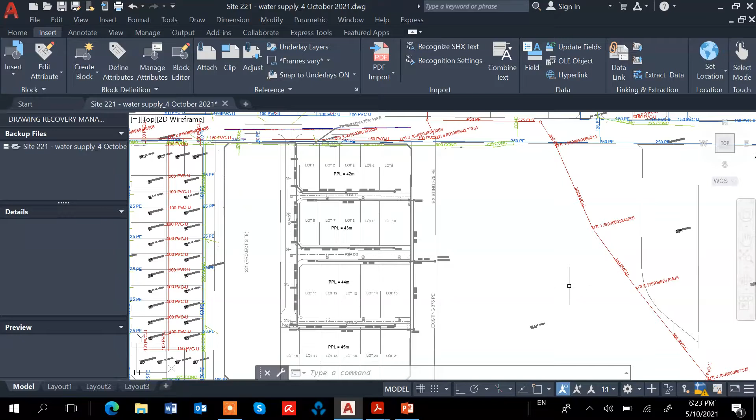So I'm not going to look at the calculation during this session, just the layout drawing only. So we will not be doing the long section because we just use the plan, and we just follow the road level. The water pipe is just about 0.6 meter below the ground. The water pipe is just 0.6 to 1 meter below the ground.

So this watermain has to be at the berm area within the road reserve area. So away from the carriageway, in between the property boundary and the carriageway, based on the water company. Okay, so the location. Let me see

So the locations. The watermain shall only be installed in public road reserve. Public watermains in private property, right of way and private road is not permitted. So we're not going to put the watermain under the roads, only during the crossing.

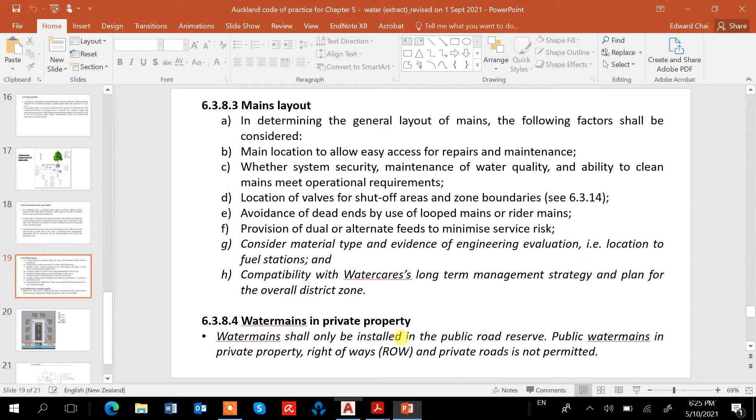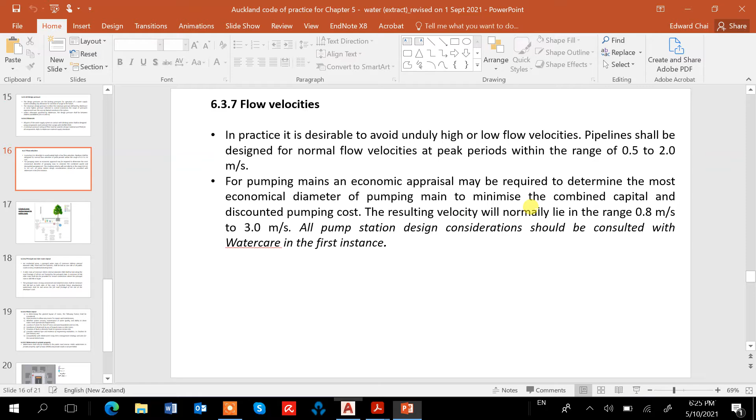Normally for tapping purposes, they will be between the carriageway and the boundary to private property. So we'll be looking at using both the principal and rider mains. For the main road, we will need to use the 100 mm diameter, I think we have designed it. So we will be using the 100 mm internal diameter watermains.

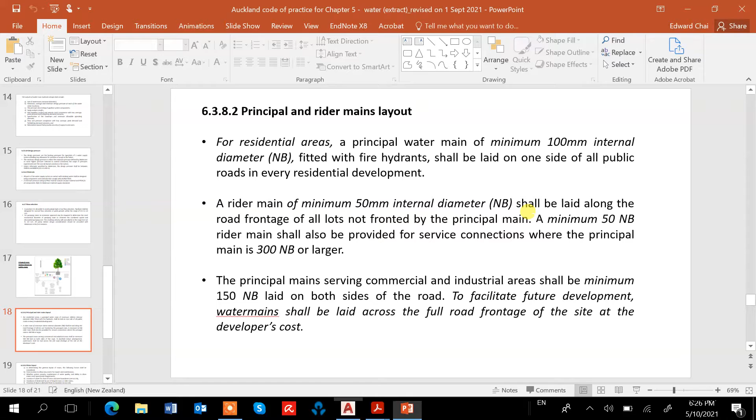And for the road, we're going to use the 50 mm rider mains. And then we have to put the hydrant as well. Hydrants need to be put on at least the 100 mm, sorry, the principal watermain. The spacing of the fire hydrants has to be not more than 135, based on SNZ PAS 4509.

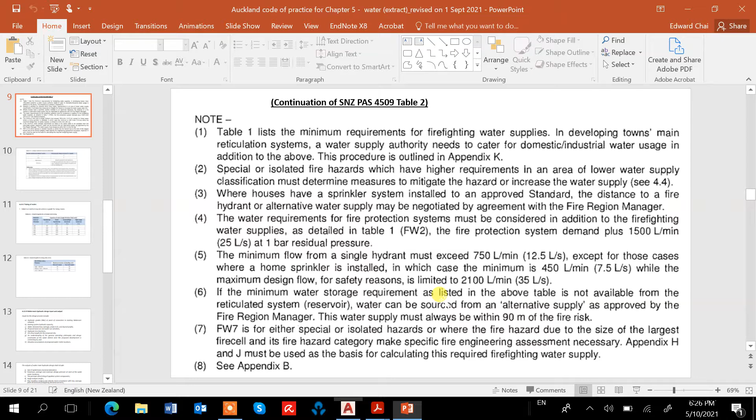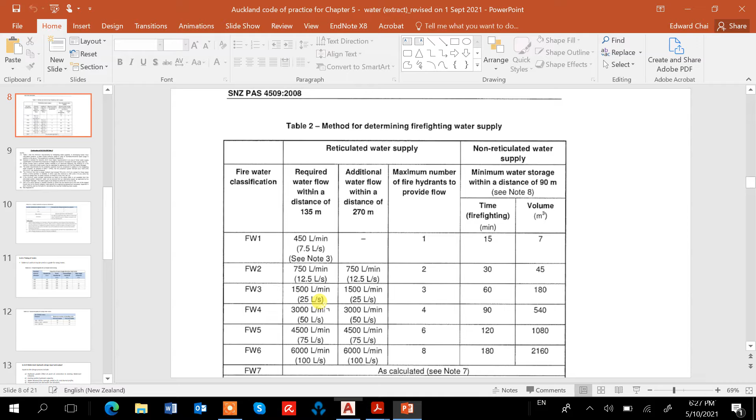So the spacing has to be not more than 135. Required water flow within a distance of 135 for the fire hydrants. I think the design part we have looked at already. I think we were using 12.5 liters per second.

So in the calculations, we used the alternative scheme. So this is different from yours. So we need to put the water pipes. During the design stage we just put the pipe anyhow, along road one, road two, and JOAL 2 as well. We need to put one water pipe down here, and then we tap it from the 250 PE.

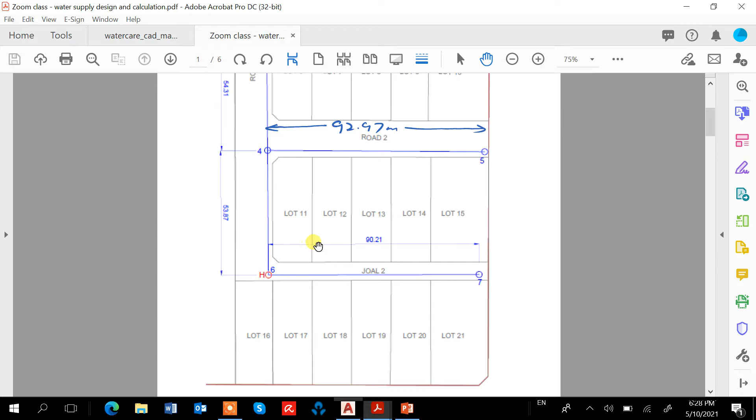The material that we're going to use, we have a choice of uPVC or PE. I think we will just use the uPVC at this stage. So we have done the design, and we came up with the pipe size. The main pipe going down, pipe 1-2, pipe 2-4 and pipe 4-6, are all using the 100 mm diameter, and for the branch, we use 50 mm diameter rider mains.

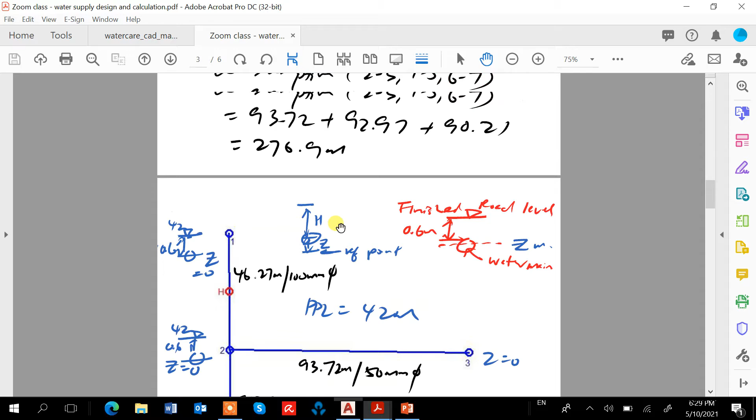But the rider main needs to serve only the lots fronting the rider main. But for road 2, we need to serve the other side as well, both lots 6 to 10 and lots 11 to 15. So even though we designed it for 50, I'm going to increase the size to 100, to cater for both sides of the road.

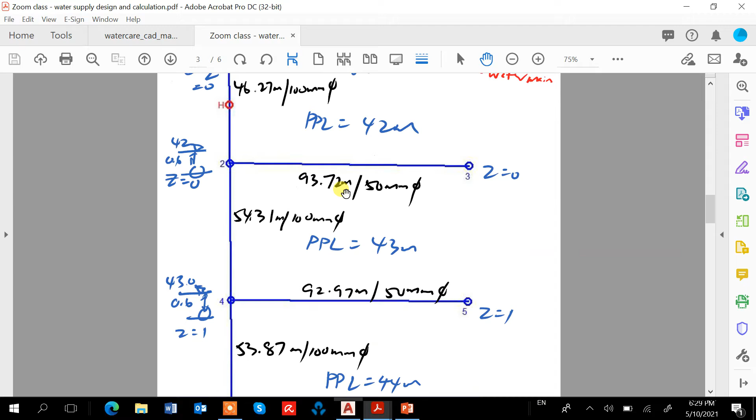For the calculation part, I think you can just refer to the previous screen capture video on this. Okay.

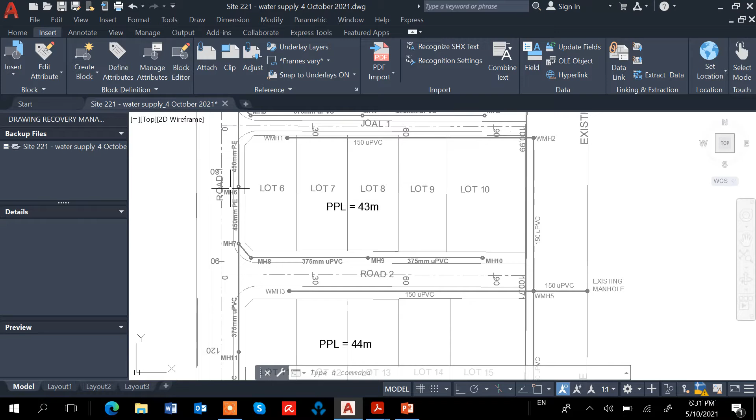Okay, so somewhere here at the side of lot 6, and then another one probably just down here at the bottom, because I could put it here as well. I think I'll just put it here. So this will cover everything.

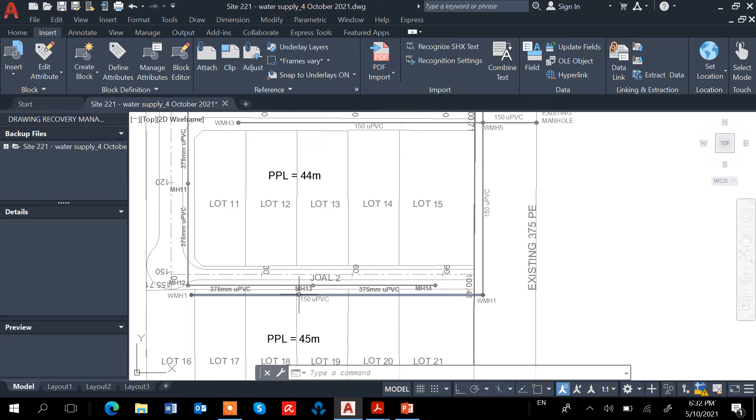It will cover the distance in case of fire for road 2 and further up, and the spacing from this to the next fire hydrant is, I think, less than 135, and then this fire hydrant here covers road 2 and road 1 as well.

Okay, so I will need to draw the pipes. Actually I've done something up there, but I'm going to redo it. So I need to do the pipes and then the fittings as well. Fittings means the fire hydrants, the valves, and the different types of valves. The sluice valve for the 100 mm principal main. For the rider main, it's called a Peet valve.

When the diameter is smaller, then we use a Peet valve, sometimes called a gate valve. So for the principal main we use a sluice valve, and the Peet valve for the rider main. The fire hydrant will be placed on the 100 mm principal main, and the end cap will be placed at the end of the water pipes, so at the end of the principal main as well as the rider main.

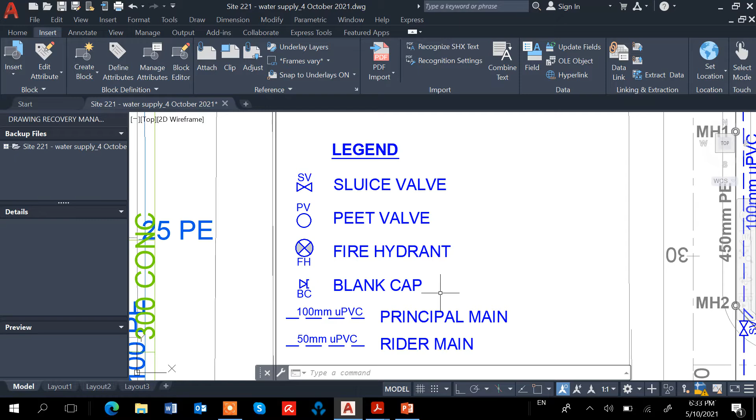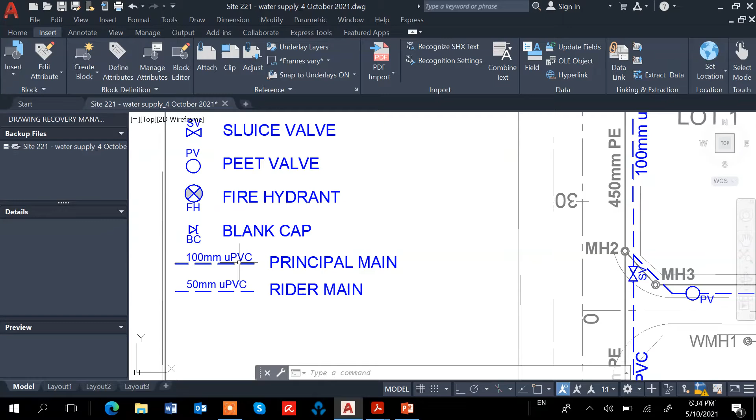Okay, so I use the dash times 2 line. This time I changed from the continuous line I used before for the stormwater pipes and the wastewater pipe. So this one I use a dash; the line type is dash times 2. To differentiate the size, I will just label it, like 100 mm, and the rider main is 50 mm UPVC.

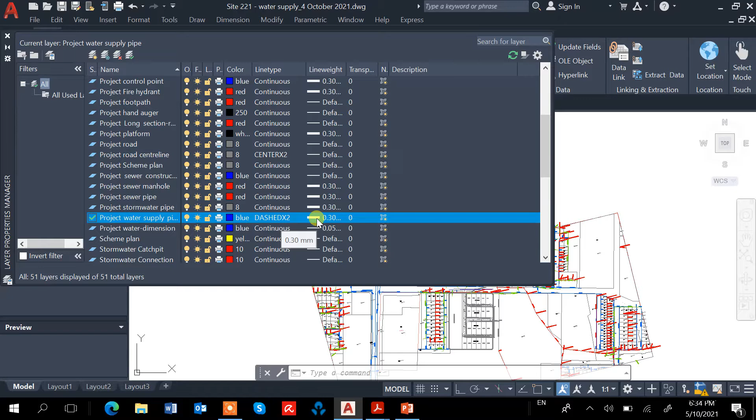So my layer at the moment is, I think, project water supply, blue, and DASHEDX2. And I use a line width of 0.3. Okay, 0.3.

And then to show the line width, you need to display the line width under Format, Lineweight. The default is 0.25. If it's 0.3, then it will show it. If it is 0.25 or less, it will not show any line width.

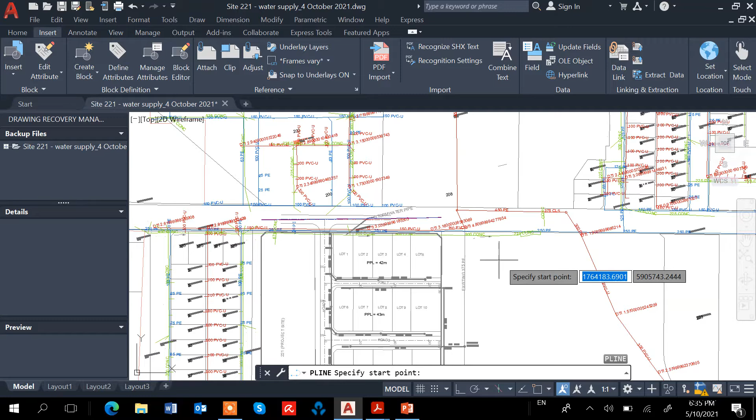Okay, so I can either do a PLINE or the line. I will do a PLINE, polyline. So I start from this. This is the watermain, the 250 PE. This is the watermain. Okay, so I just start it from here.

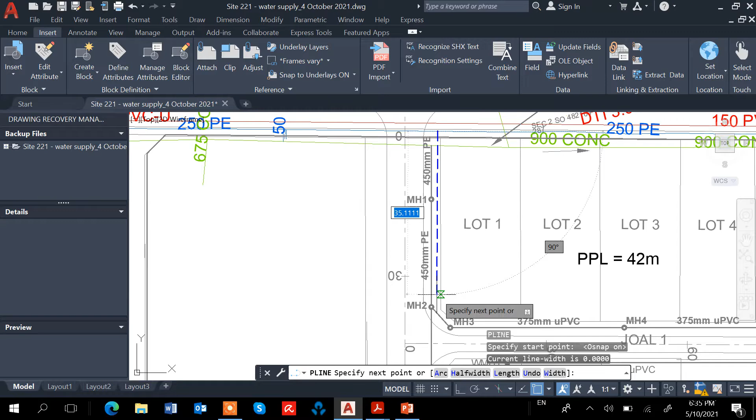I want to do it here, between the stormwater pipe, 450 mm PE, and then the lot boundary. I want to put something in between, but I have to cross the road as well. So the pipe will need to cross the road.

Sometimes it could have protection for the pipes, the PVC. If it's steel pipe, it's okay, it will be strong enough. But sometimes with PVC, inside the trench you need a protection on top. Sometimes there are different ways to protect it, to compact the material, and sometimes you even put a concrete cover on top of it.

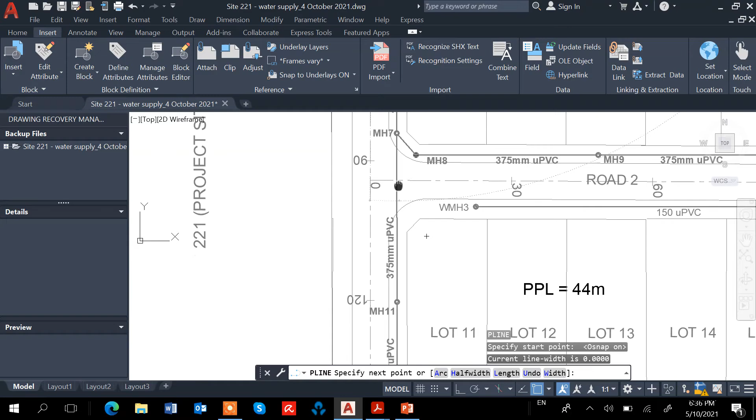So I just draw it all the way down, somewhere in between this stormwater pipe and the boundary. So I'm going to put it here. I think I'm going to put it down all the way about here. I don't need to go to the end. I just stop here. I put an end cap.

Okay, so I do the same for the other side. There's a space here. I need to put it between the stormwater pipe and the property as well. I think I do a PLINE. I will do it here. Okay.

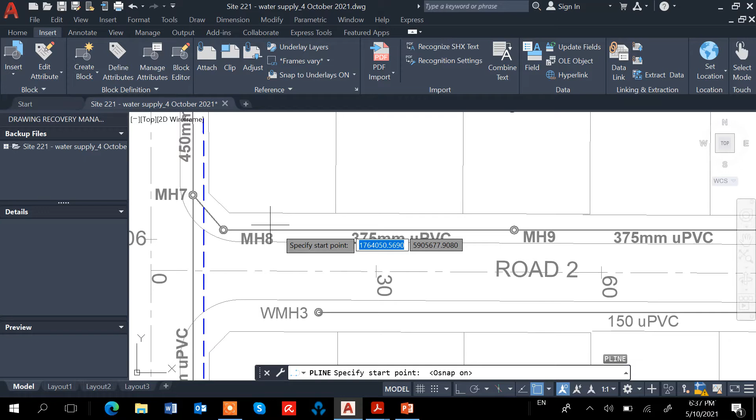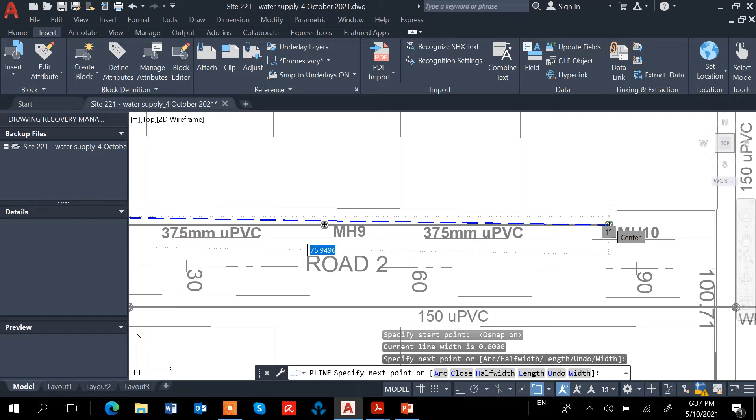So with the water pipe, we don't need to put any manhole when there's a change of direction, because water pipes usually have fittings like 22.5 and 45 degree bends, and I think 90 degree bends as well. So we don't need any manhole when there's a change of direction or change of grade. The fitting will do.

But we need to provide a lot of valves, because sometimes there's a water leakage, and then we need to shut the valves so that the section with the leakage can be repaired or replaced. We shut the two valves, and then we just repair the part that is broken.

This network is not very good, because the loop one is better. With the loop one, if you shut the valve somewhere, you can stop a localized leakage, and the water can still go around from the other direction, the other line, because everything is in a loop. So you shut it off, but the water can go around from the other direction.

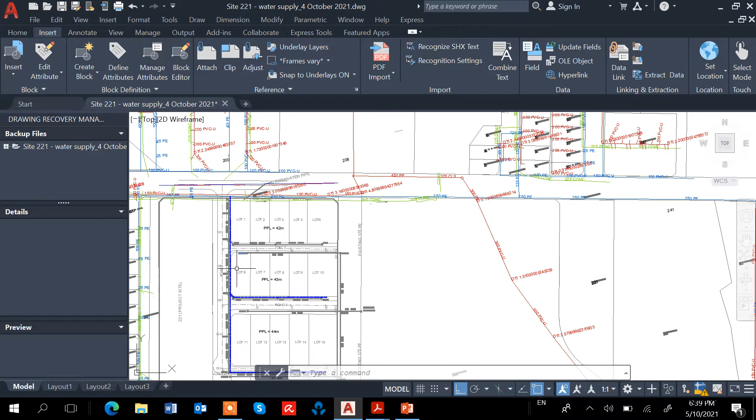So this one is a tree branch network. If you shut it off here, and here, for example, then all the water pipes down here have no water. If you shut it off, let's say here, then only the water pipe fronting lots 1 to 5, you can put a valve.

Somewhere is leaking, so we just shut off this valve here, and the water will not go through. But this is the branch network. It only allows lots 1 to 5 to use water, and the rest have no water. So that's not that good for this branch network.

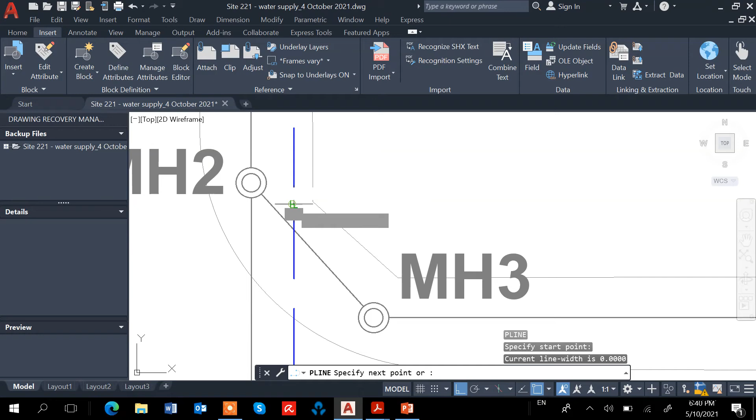Okay, so this one I think I need to do it here. I want to do it somewhere here. Turn off this snap. Oops, let me try again. PLINE. Okay. Let's put the line at the end.

Okay. So this is the main line, the main part. I'm going to use UPVC pipes. Okay. So I'm going to put the valve. I'm going to draw something up here. I'll probably just copy the legend.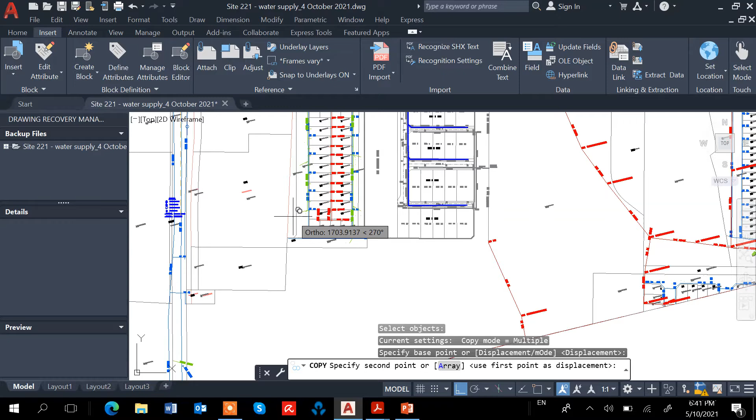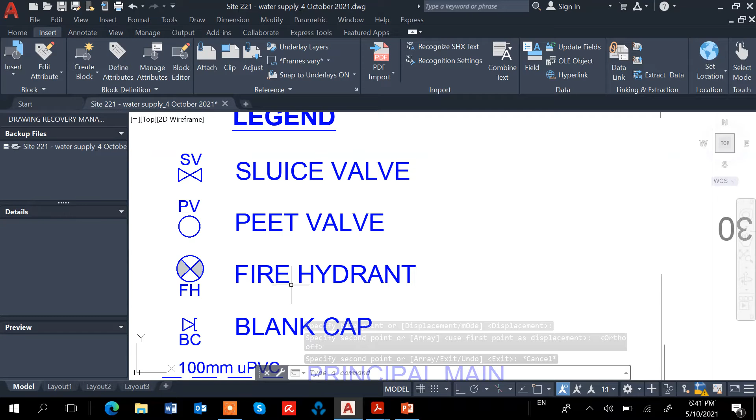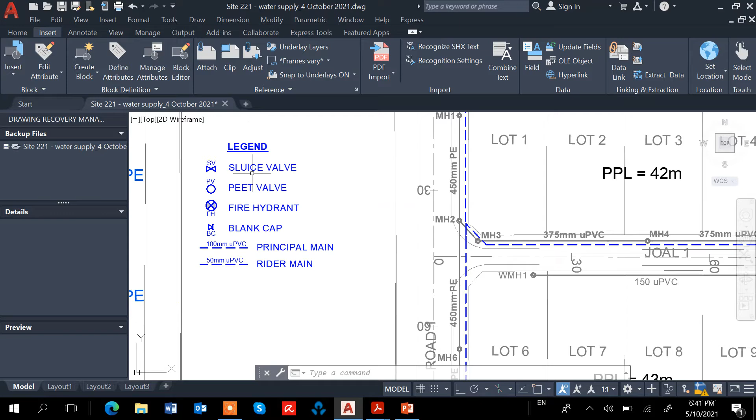Okay, so these are the legend for the sluice valve, the peet valve, the fire hydrants, and the blank cap, all these things. So basically, you just do it to size, not too big, not too small. I didn't see any standard for the dimension of the valve. So I think you just make sure that it's symmetrical.

The symbol for peet valve is a circle, and then the fire hydrant you do something like this. It's about four equal segments, and then this is a blank cap. So this is a symbol for blank cap, and I just use dash times two lines for this. And so I want to put the sluice valve. A sluice valve will be...

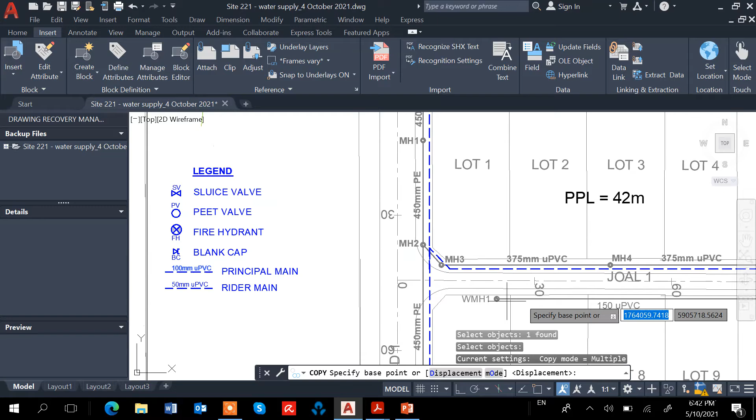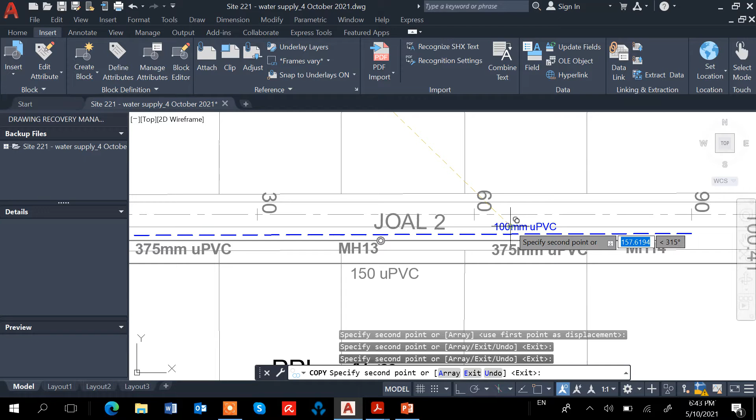I'm going to copy the watermain. This one in the middle is going to be 100. Top one will be 50; I'm going to change it later on. This one is going to be 50 as well. JOAL 2 going to 50, and then road 2 I'm going to keep as 100, and then road 1 I'm going to change to 50.

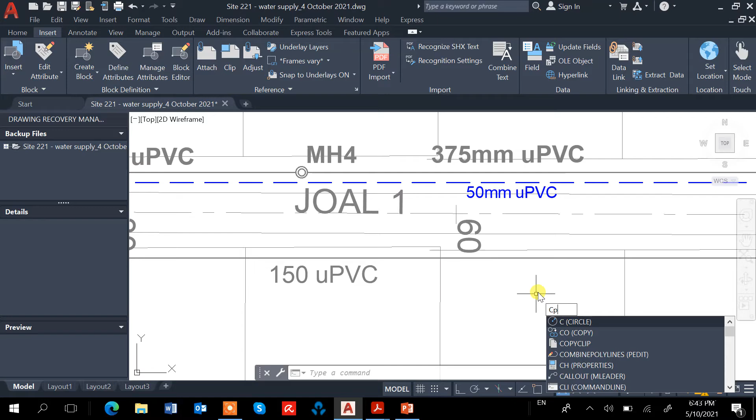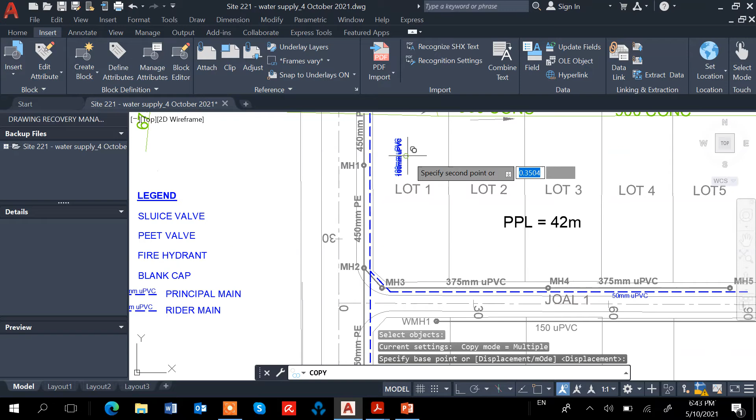So I copy. I need to label the pipes along road 1 as well. I'm going to rotate this 90 degrees. So I'm going to copy. Just somewhere there, and then the next one as well, and the one down here as well. So this will be 100 mm UPVC pipe. I just delete that. So now I have named all the pipelines.

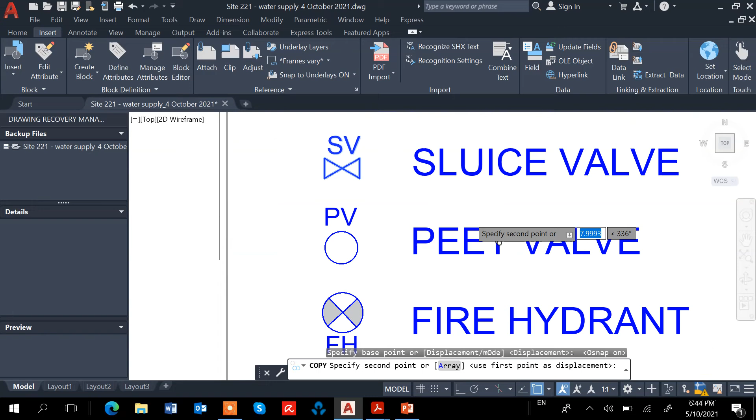So I need to put the sluice valve as well. Let's copy. Let's put it, okay. For the 100 mm, I can put a sluice valve. Let's put it here. Okay, I need to trim it. TRIM, trim. Copy this sluice valve to the top as well.

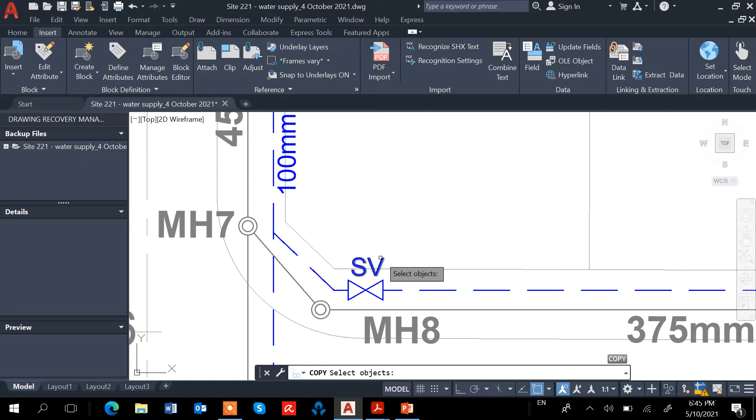Because I'm going to put it along the pipe along road 1, I'm going to rotate this 90 degrees. 90. Yes, okay. I think I just move it. I'm going to put the SV here to the other side. Okay, so I copy.

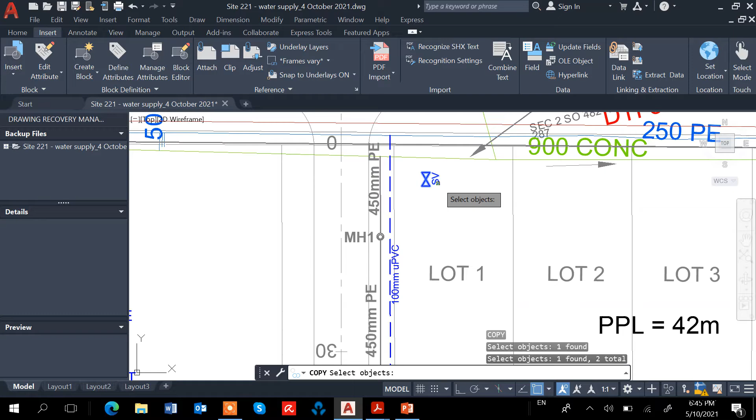I need to put one here so that if there's any leakage, I can stop here. I need to put one down here as well, because if there is any leaking down here, then I can just close it, and the pipe to road one can still be used. Okay, I don't need to do another one. At first I thought I needed another one here, but because we don't have any loop, it doesn't make any difference.

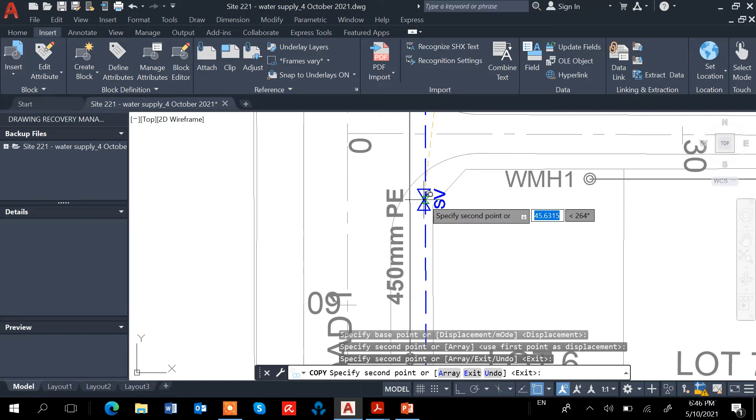If there's a loop, let's say the pipeline across the road is broken, I can just put a sluice valve and stop these two sides, and then just replace the pipe. But here with the tree branch system, there's probably no meaning to put another valve here, because I'm going to put one valve down here, and then it will just be a longer section.

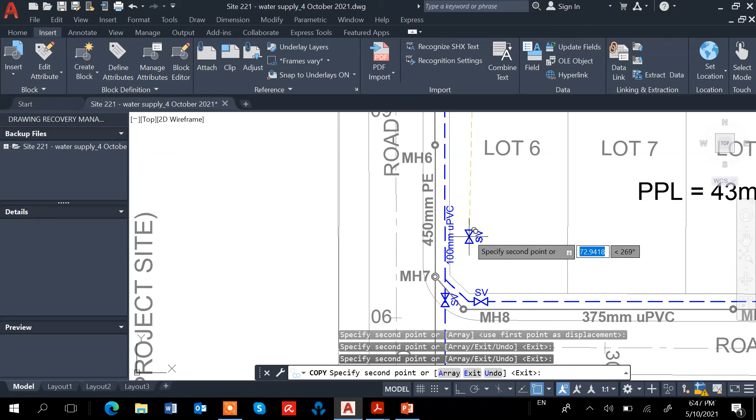Okay, so I got a valve here as well. If there's anything leaking, I can just stop this valve up here and these two sluice valves, and do the repair. So I'm not going to put another valve here, because there's no loop. So I'm going to put another sluice valve down here.

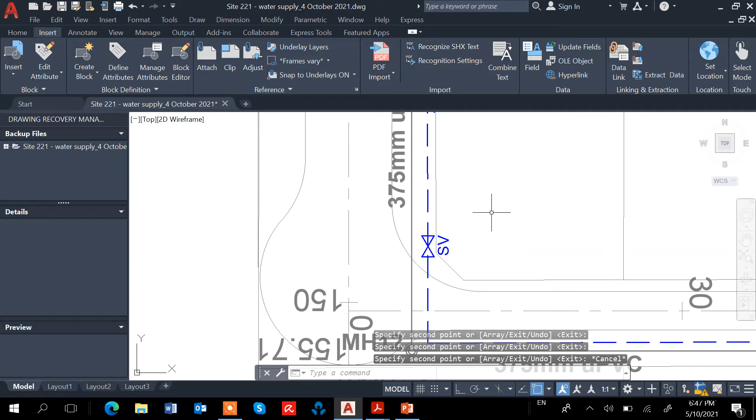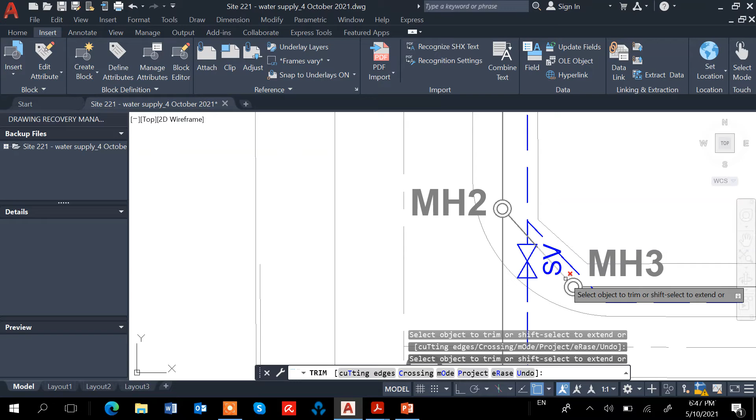Okay, I can trim it. TRIM, trim. Let's trim this one, the sluice valve. I think if you trim it, it looks better. If you don't trim it off, it looks a bit untidy. Okay, that's a sluice valve. I don't need this anymore, I just erase it. Need to grab hold of the Peet valve as well. Copy.

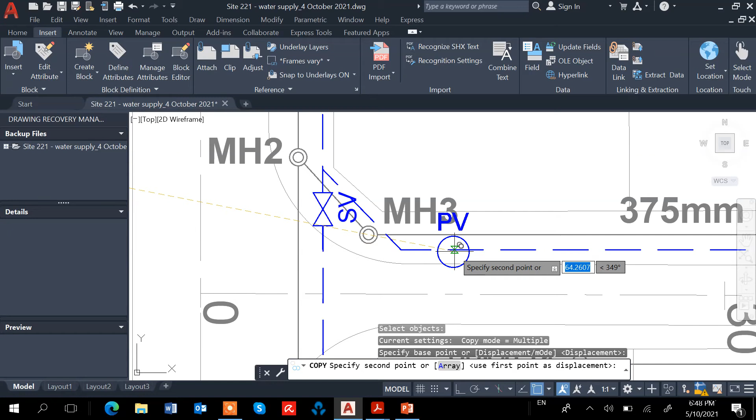Grab the middle. So I put one here. Later I need to shift the PV so that it doesn't interfere with the MH3. I need to put one here as well, almost at the end. Okay, I put the blank cap at the end as well.

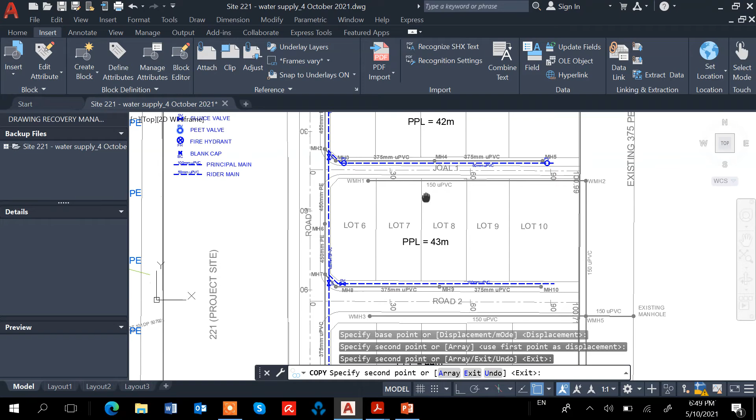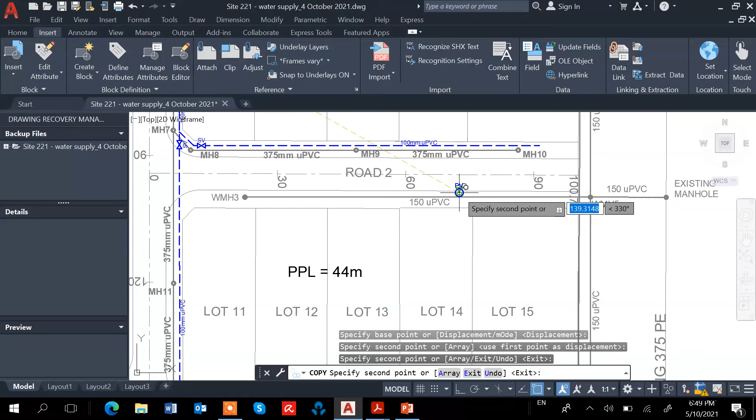Okay, so for most of the pipes, the open pipes, we need to put a blank cap so that the thing is protected, so nothing can go inside, like earth material or insects. So we need to keep the water pipes closed. Oh, actually I need to put the sluice valve at the end. Need to put

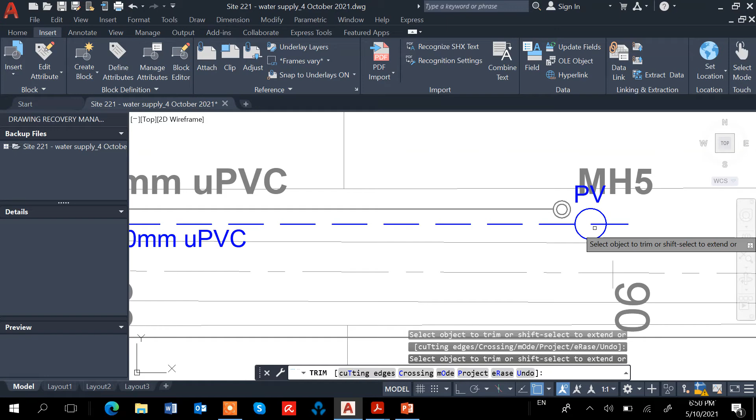I put it here because this part I'm still going to keep as 100. I'm going to put the fire hydrant here, so the fire hydrant will be here. So I move it further down, and I need to put one here. Okay, so I trim it. Trim. Trim that. Okay, so there's a sluice valve, and then the peet valve.

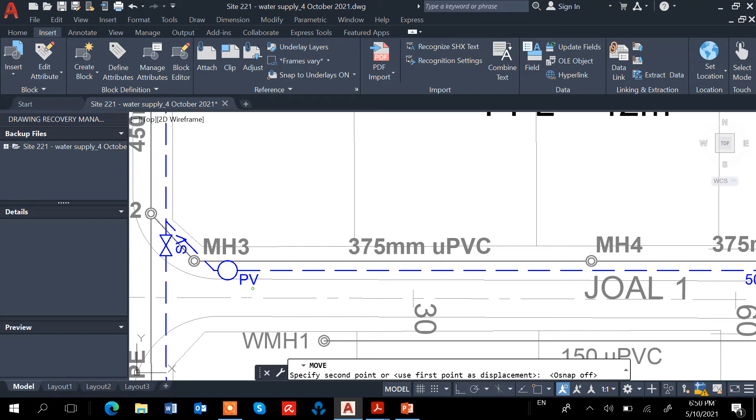So I need to move the PV so it's not blocking. Just turn this off. PV. Okay. Same thing I do for this PV. Move the letters, the word PV. Let's say here. Okay. I need to do the blank cap as well. Copy this blank cap.

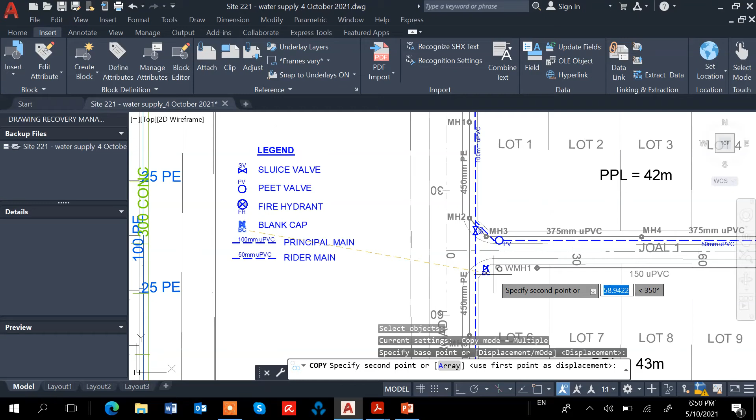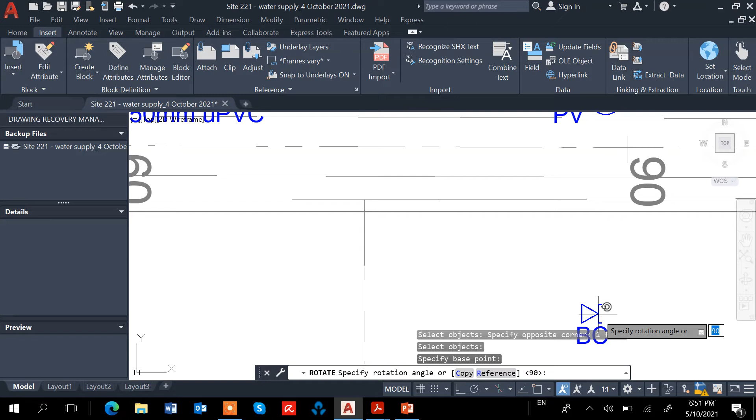Okay, it needs to be the other direction, because this triangle needs to be on the other side. So I just rotate it. Rotate 180. Okay, so I just copy this, take it at the intersection. Okay, that's it. And then here as well.

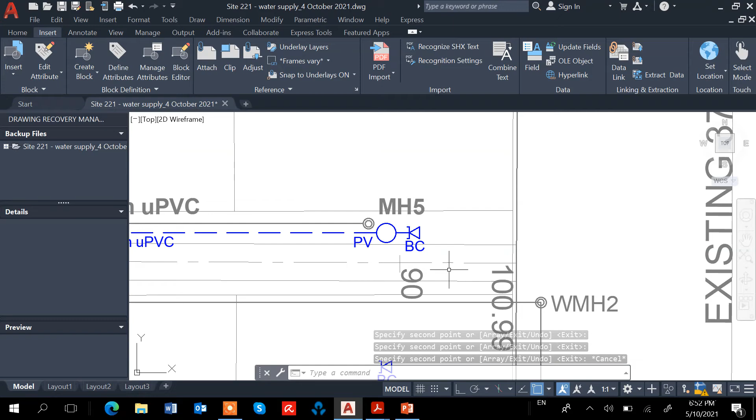I need to move the word BC later on. BC, not PC. Okay, this one, the BC, I need to move it. Maybe. Yeah, I think it's okay. Here it's okay. This one I think needs to move up. Move. I could move it here.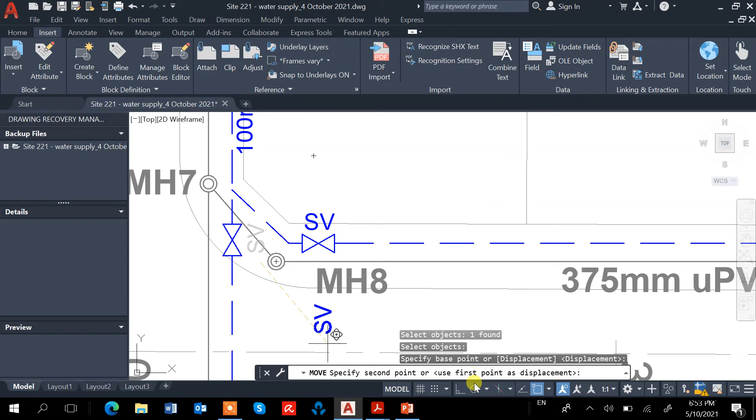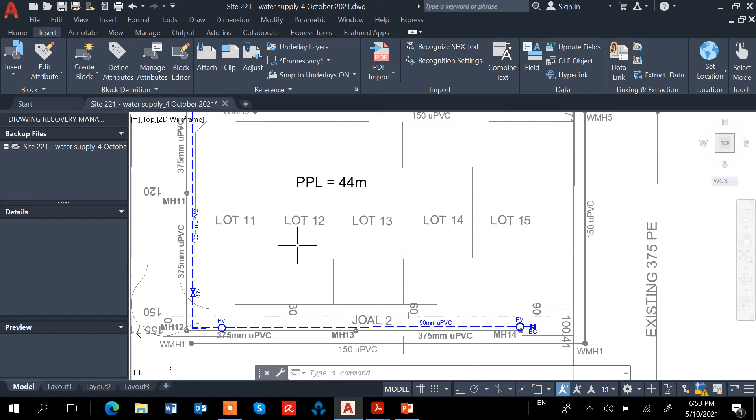Okay. So this is the layout with the pipes and all the fittings. Okay, so I think this is SV. I just move it somewhere so it's clear, so the word in the symbol doesn't overlay with the lines. Okay, so that's about it for this water supply layout. I think it's about the same as the other one.

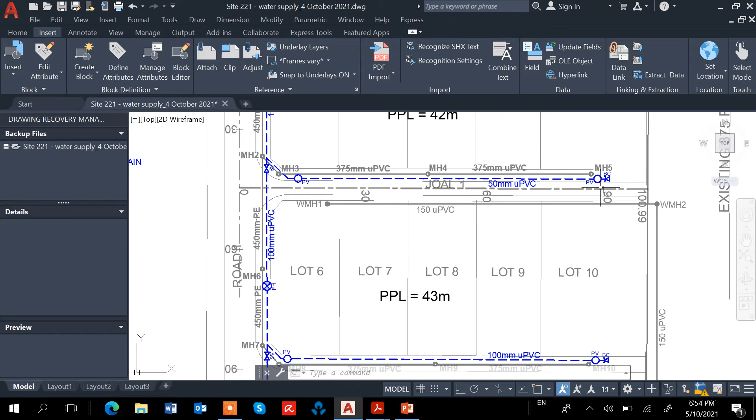Okay, the only thing is I think I made a mistake here. I need to change it. This one, the 100 mm, rather than PV, needs to be SV. So the PV here and the PV here need to be changed to SV. Okay, I think I still need to put the fire hydrant.

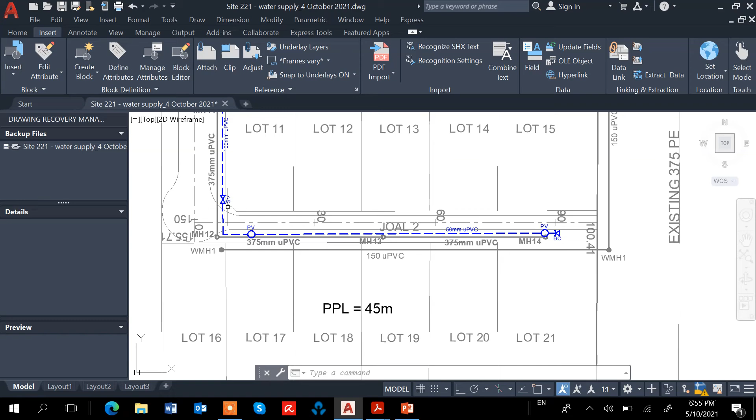I could put it up there as well. Or if I put it up there, then I would need to move the sluice valve. Actually, I don't need to put a sluice valve here. There's no need because, yeah, okay, maybe I don't need it because there's a valve here.

Okay, so some of the things I didn't put in, like the reducer, the valve reducer. When you join the 100 mm to 50 mm pipes, you need to have a reducer to do it. I didn't put it because there are quite a lot of things I didn't put in as well. When the pipes change direction, you need to have a bend, like this one's 90 degrees.

Some of them, for example this one, could be 45. And then they have anchor blocks as well. So normally they are in the fittings, in the details for the water supply. So the details of the fittings.

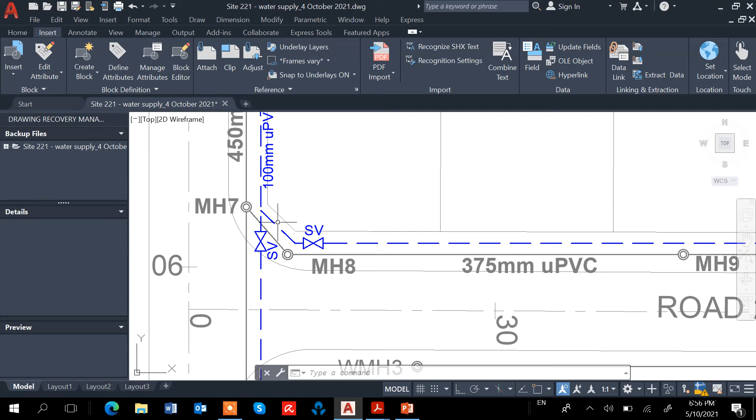So even the fire hydrant as well, they got the detailed drawings. Some of the things we cannot specify everything. Even though every lot there, we have to put the connecting line going in, and there's an end cap. It's understood that the contractor will put at least one connecting line to each of the lots.

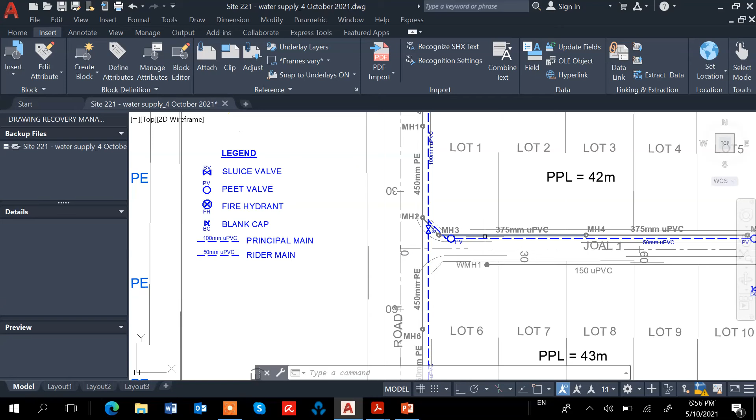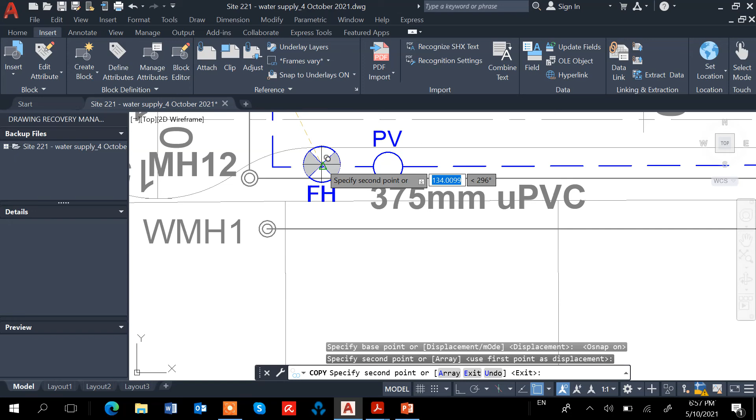So I just copy the fire hydrant, grab the center, and put the fire hydrant somewhere here, and then another fire hydrant here. So I just move the FH, fire hydrant later, I just move it to the side.

A lot of the time, like the Watercare, they will mark the fire hydrant position as well. But here, what I don't do that, because it's too many details. I just trim it.

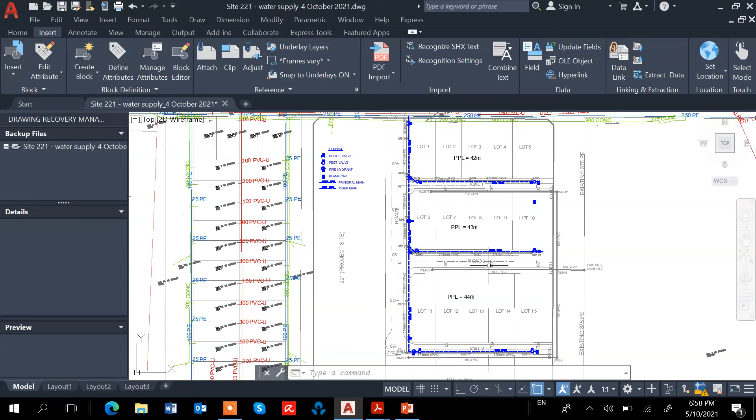So for the water main, for the water supply, we don't need to do the long section because all the pipes, the plan will be like this. The depth of it will be just 0.6 to 1 meter deep. So we follow the guidelines.

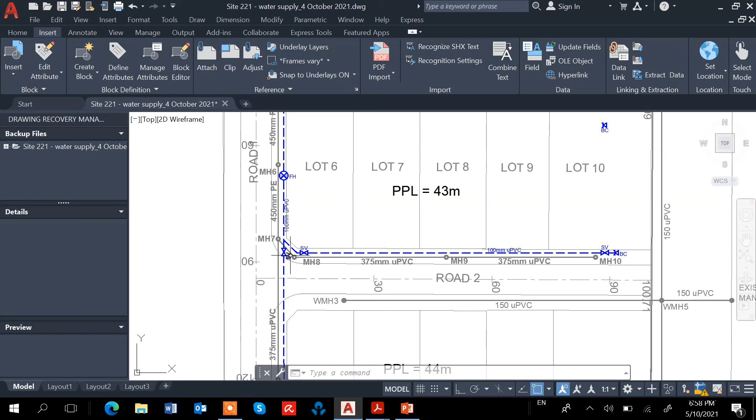Some of the, actually I saw some of the places, the water supply line actually goes inside the private property. But sometimes you can put a valve in the middle of the road as well. I think it can carry, it can stand the chamber of the sluice valve, it can stand the traffic loading.

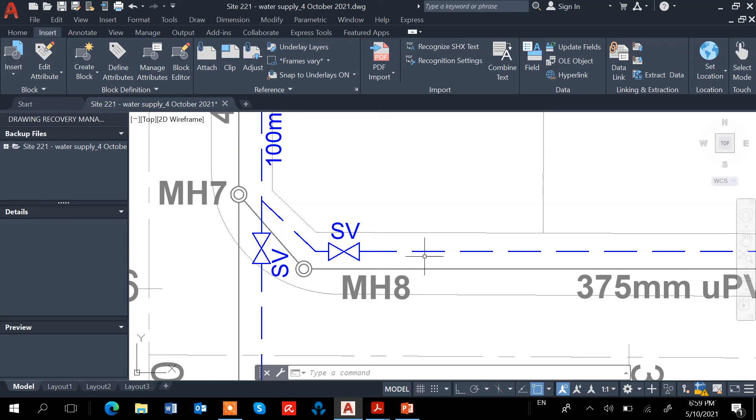But I just now saw the Watercare requirements, so everything just put between the private property and the carriageway. So I just try to do that. But there could be some exception - sometimes if there's no space, you could put the water supply line in the private property, just near to the edge.

So we don't need to do the long section, so it's easier. For the roads, you need to do cross section and long section for each of the schemes - road one, junction one, road two, and junction two, you need to do the long section. For the stormwater pipe, you need to do different long sections as well. And for the wastewater pipe, you need to do the long section along the sewer line.

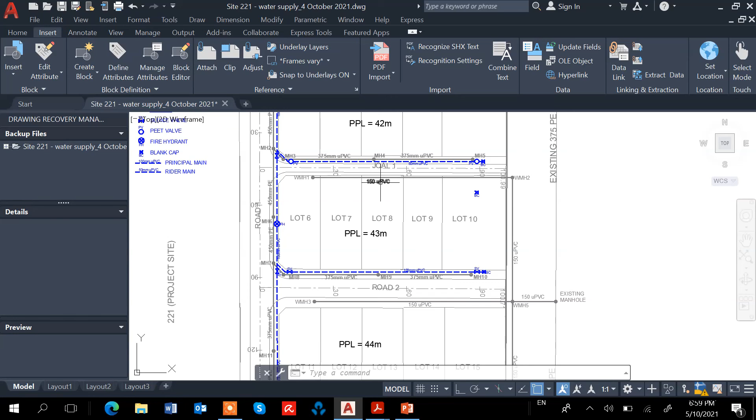So the sewer line is like this, 150 UPVC. You need to do, there are three lines - here there's one, and then here another one, and the bottom here there's one going this way and up to this line. So only the water supply, you don't need to do the long section. And for all the different types, whether water supply, wastewater, stormwater, you need to provide the details as well.

Details of fittings for like the manhole. So for this one, the water supply is a bit different from the wastewater, because the water supply, the drinking water is very clean.

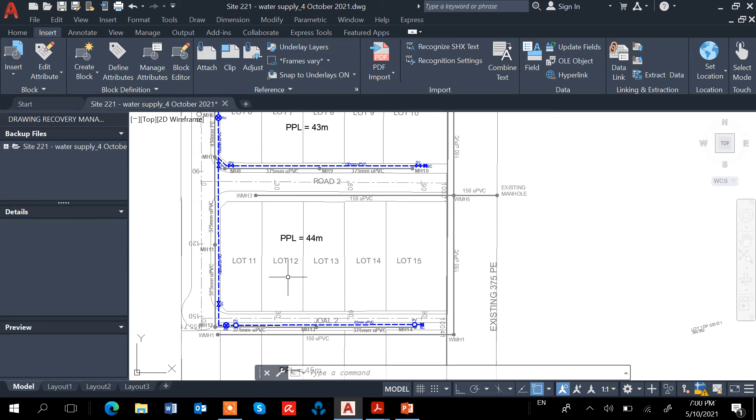You don't need to provide any gradient, the gravity, because actually there's the pressure there already - this existing water supply, the water pipe, they already have certain pressure in terms of how many atmosphere. One atmosphere is about 10 meters. So this one could go up to 30 meters high, which is 3 atmosphere.

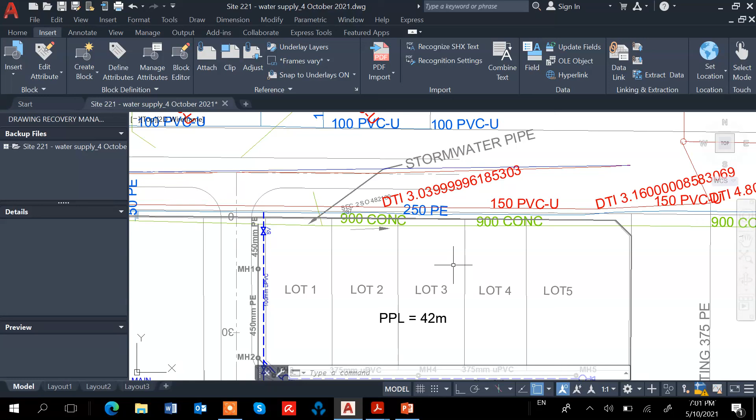So the pipes are designed so it can sustain, like this one, the PN 12, PN 16 - that means it can sustain 12 atmosphere, which is 120 meters. PN 16 can sustain 16 atmosphere, or 160 meters. So the PVC, I think there's also something designed for this - PN12 at least can withstand 12 atmosphere or 120 meters of pressure.

So yeah, so this is the drawing, the layout drawing for the water main. I think I will stop here now. Thank you.